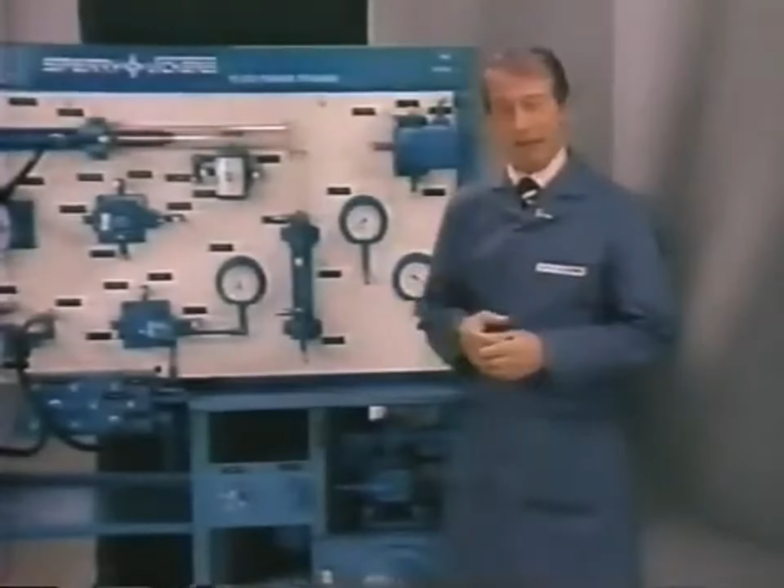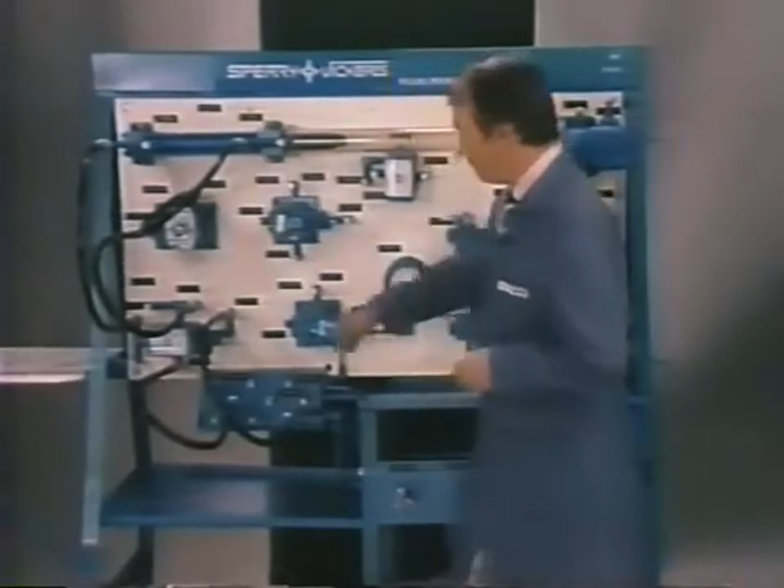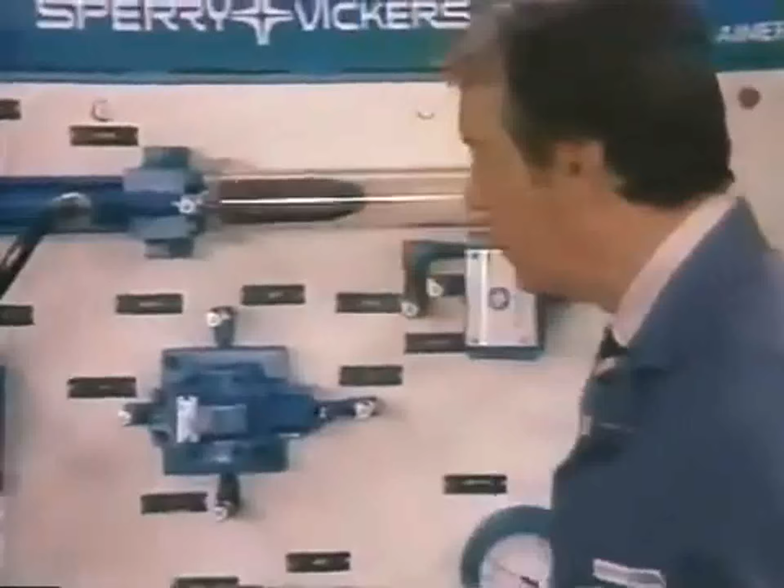Hydraulic circuits, even the most complex ones, are made up from a surprisingly small number of different components. Here on our fluid power trainer, for example, I've set up a circuit that includes a vane-type pump, a relief valve, directional valve, flow control, and cylinder. This type of circuit, with its slow feed forward and rapid return, can be found on any number of machines.

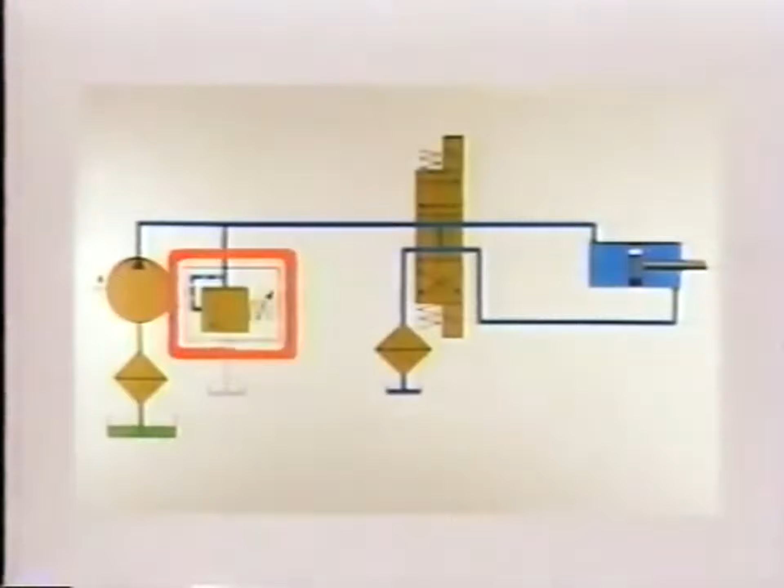Now, by shifting the directional valve back and forth, we can make the cylinder reciprocate, but we haven't provided a place for the oil to go when the cylinder stops at each end of its stroke. So we need a form of pressure control. We'll use a relief valve. Now we'll need something to drive the pump, and that can be anything you select, from an electric motor to a windmill, as long as it can provide the necessary torque and proper drive speed.

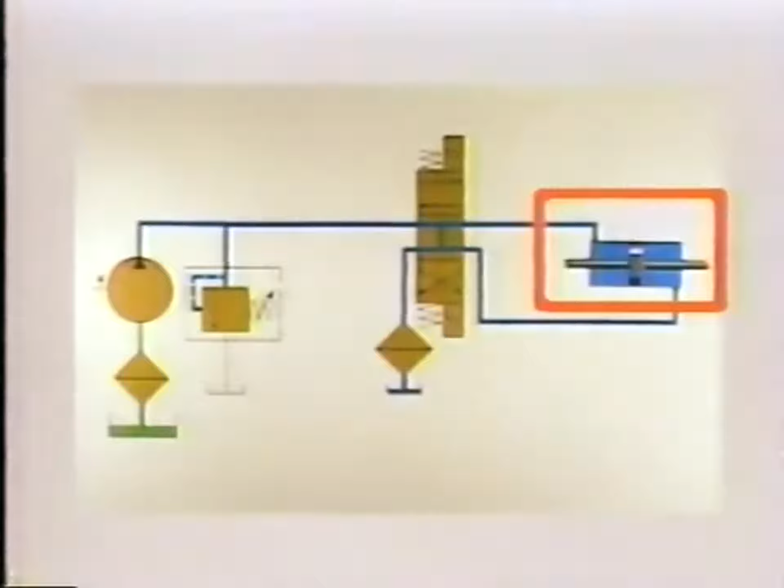If this were a circuit for a grinder, we might have a problem. The table would move faster in one direction than the other because of the differential areas in the cylinder. A simple fix would be to use a double-ended cylinder. Then the speeds and forces would be equal in both directions. Now, there is another way we could get the same results. It's called a regenerative circuit.

For equal speeds and forces, a cylinder with a 2-to-1 area ratio is used. That means with the piston retracted, the fluid in the rod end would be 1/2 of what's needed to extend the cylinder. To make it work, fluid from the rod end, instead of going to tank on the extending stroke, is routed back to the inlet side of the directional valve, and from there into the cap end. This means we will have equal pressure on both sides of the piston. But the greater force on the cap end, because of its larger area, will cause it to extend.

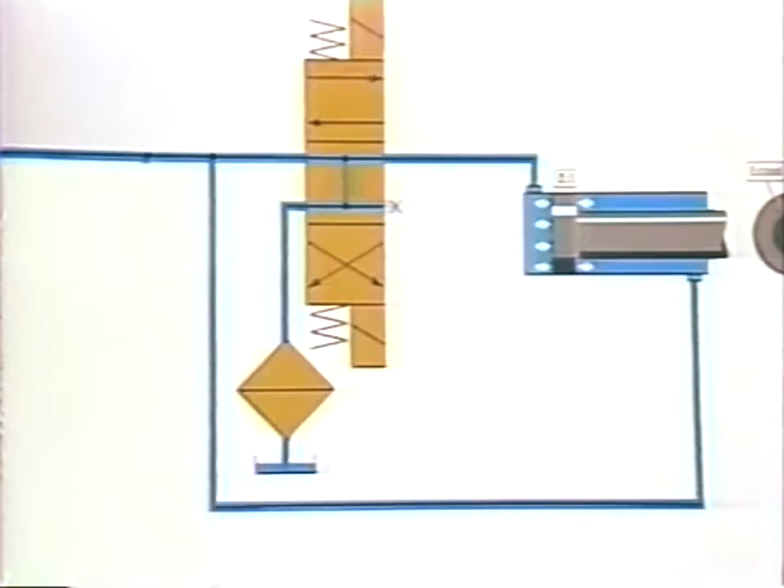Since the fluid displaced from the rod end provides half of the fluid required to extend the cylinder, the pump needs only to supply the other half, and it will take only half as long as it would in a conventional circuit. No, we didn't get something for nothing. Pressure in the rod end resists the forward travel, so what we gained in speed, we lost in force.

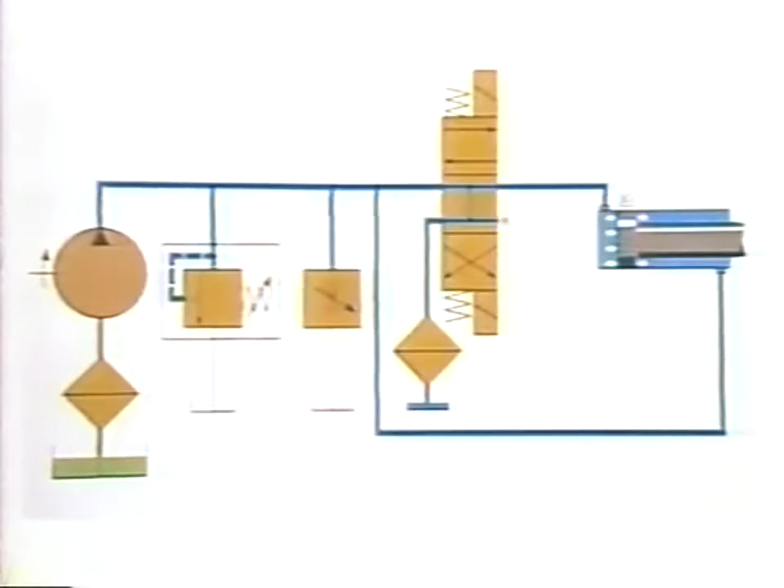If it were necessary to regulate the speed of the cylinder, this would be a good application for a bleed-off flow control. The workload is fairly constant, and there's no tendency for it to run away. We would save some energy, too, in that the pump would operate at the workload pressure rather than the relief valve setting.

Now, it's often necessary to have 2 cylinders which operate in sequence. That is, one must complete its stroke before the other begins. An example might be a clamping cylinder and a work cylinder. Naturally, we'd have to clamp first, but fluids take the course of least resistance, and if the work cylinder moved easiest, we'd be in trouble. Such an application calls for a sequence valve, which will not only assure that the clamp moves first, but also maintain sufficient pressure to hold the workpiece as the second cylinder approaches.

This time we'll use a single directional valve to control both cylinders. The sequence valve, which is held closed by an adjustable spring, will prevent flow to the work cylinder until the clamp is firmly in position. When pressure reaches that required for clamping, it will overcome the sequence valve setting and permit flow into the work cylinder. Pressure in the clamp cylinder will be maintained at the sequence valve setting regardless of how easy the work cylinder moves.

However, as pressure in the work cylinder builds up beyond the sequence valve setting, the clamp pressure will also increase. Sometimes, to avoid crushing the workpiece, a pressure-reducing valve is used to limit clamping pressure to a safe maximum.

A pressure-reducing valve is held in its normal open position by a spring and is closed by pressure sensed at its outlet port. With a sequence valve and a pressure-reducing valve added to our circuit, we can not only cause one cylinder to move before another, we can maintain pressure on it between set minimum and maximum levels as the second cylinder performs its function.

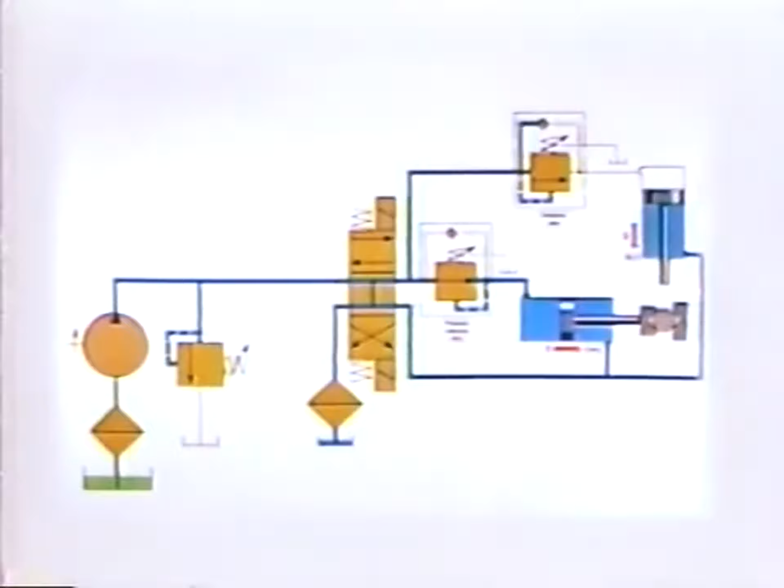Now, let's try a rapid traverse and feed circuit. They're quite common in machine tool applications for drilling, tapping, and similar functions. Since the work will be done on the extending stroke, we'll use a long cylinder with a single rod. In order to be able to stop in mid-stroke, we'll need a 3-position directional valve, which is spring-centered with at least the cylinder ports blocked.

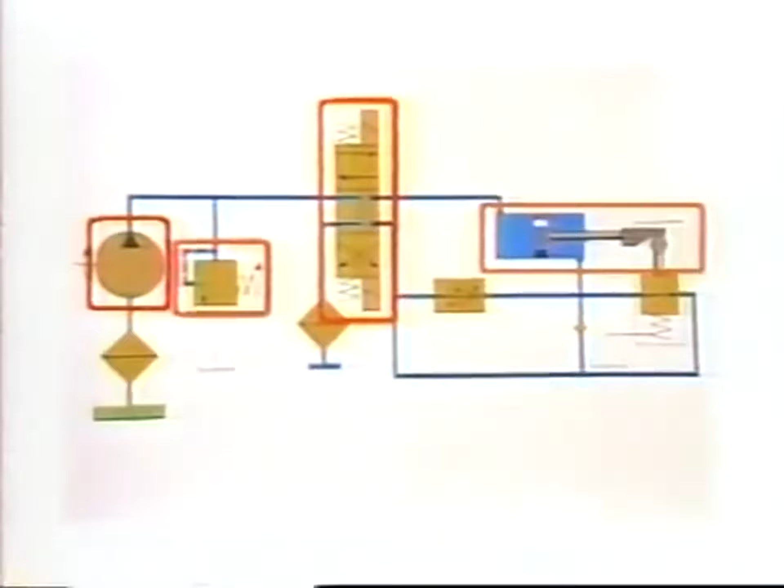Next, a large volume pump to provide the speed we'll need in rapid traverse, and the ever-present relief valve. Have you noticed these are the same basic units we used before? This time we'll put a flow control in the exhaust line from the cylinder. A drill might pull ahead as it broke through the work, so a meter-in or bleed-off circuit wouldn't do.

We now can control the cylinder's speed during its entire extending stroke, but that's not quite what we want. We need to move up to the work quickly, then slow down just before the drill contacts the work. To do this, we'll use a cam-actuated shutoff valve that's normally open. Its proper name is a deceleration valve.

We'll place it so it can be closed by a cam on the cylinder rod and pipe it so flow can bypass the flow control during the rapid approach to the work. By properly locating the cam, it will cause the cylinder to decelerate and feed into the work at the flow control setting. Both flow controls and deceleration valves are available with integral check valves for reverse free flow. But we'll place one here for the sake of clarity. It will bypass both valves for a rapid return stroke.

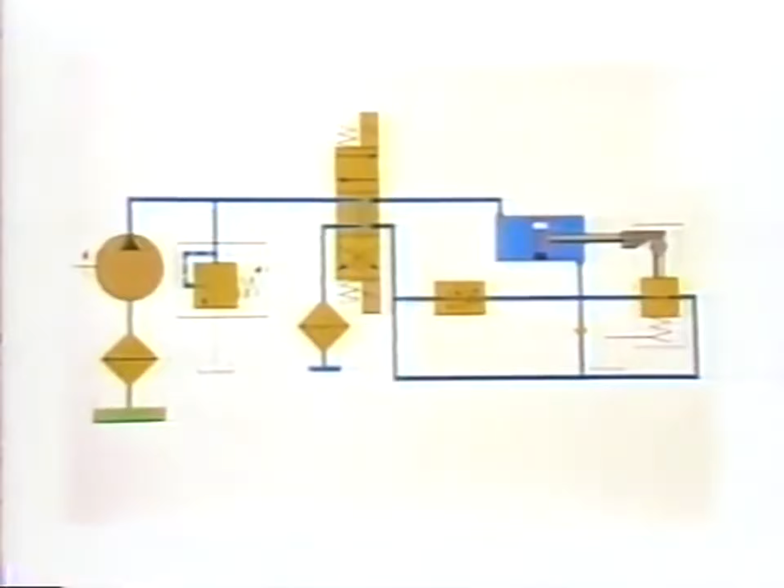As we mentioned, this circuit is typical of many applications where a large volume of fluid is required at low pressure to move quickly up to the work. Then only a small volume at high pressure is needed for the work portion of the cycle. With the single pump selected, the bulk of its delivery is not being used during the feed portion of the stroke. As a result, it returns to tank through the relief valve at its setting, and a great deal of energy is wasted. I might not have mentioned this if we didn't have a fix, but luckily we do.

It's called an unloading circuit, and it uses 2 pumps, one large and one small. The small one needs only enough volume to supply a little more fluid than our system requires at high pressure. The large pump will help out when the going is easy, during rapid approach and rapid return. To complete our package, we'll need an unloading valve and a check valve. The 2 pumps piped together will replace the single pump and provide the large volume required at low pressure.

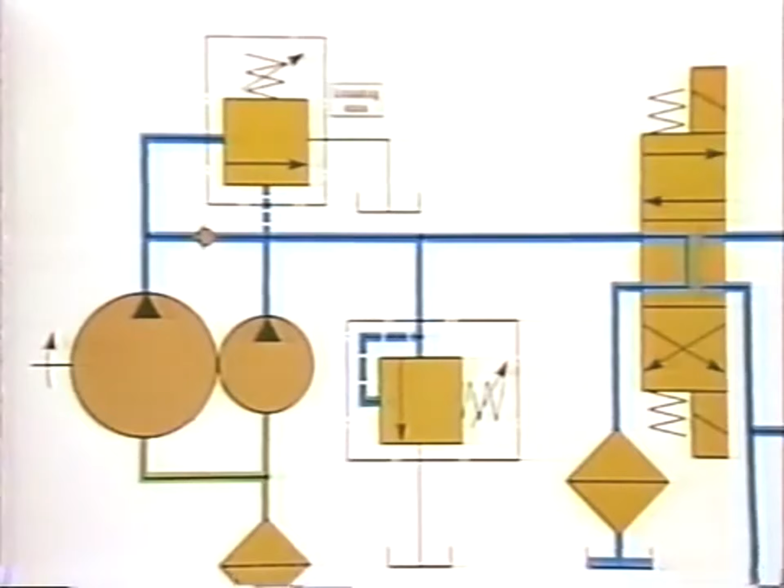When the pressure builds up, as it will when we go into the work portion of the cycle, the unloading valve opens, permitting the large pump flow to return freely to the reservoir. The small pump, however, cannot get through the check valve and continues to operate up to the relief valve setting. As the cylinder returns at low pressure, the unloading valve closes, and the large pump volume again joins the small one for a rapid return.

Come to think of it, we not only save energy with this circuit, we can usually get by with a smaller electric motor. With a single pump, the motor has to drive its full volume up to the relief valve setting. Using 2 pumps, the motor drives the combined volume up to the unloading valve setting.

The large pump delivery then goes to tank at little or no pressure, and only the small pump goes to the relief valve setting.

Now, how about another application? A hydraulic curing press. Here again, we'll need a lot of oil to close the press quickly, then a small amount at high pressure during the curing cycle. Sounds like another good application for an unloading circuit, and it is, but we're going to try another approach, an accumulator, a device for storing oil under pressure.

First of all, we're going to need a pump, relief valve, directional valve, and cylinder. If we select an 8-inch diameter cylinder, it will have an area of 50 square inches, and at 1,000 psi will develop a force of 50,000 pounds, or 25 tons. A 15-inch stroke would require 750 cubic inches, or 3.25 gallons of oil. So a 20-gallon-per-minute pump would close it in 10 seconds.

We'll use a closed center valve, but put a counterbalance valve in the line from the bottom of the cylinder. It does just what its name implies. It counterbalances the weight of the press platen and keeps it from falling. We're now able to open and close the press and build up to 25 tons of force.

But to hold it for several minutes would have our 20 gallons per minute pump running at 1,000 psi, with most of its delivery going back to tank through the relief valve, and that's not practical. We'd be wasting nearly 12 horsepower. Now this is where the accumulator comes in.

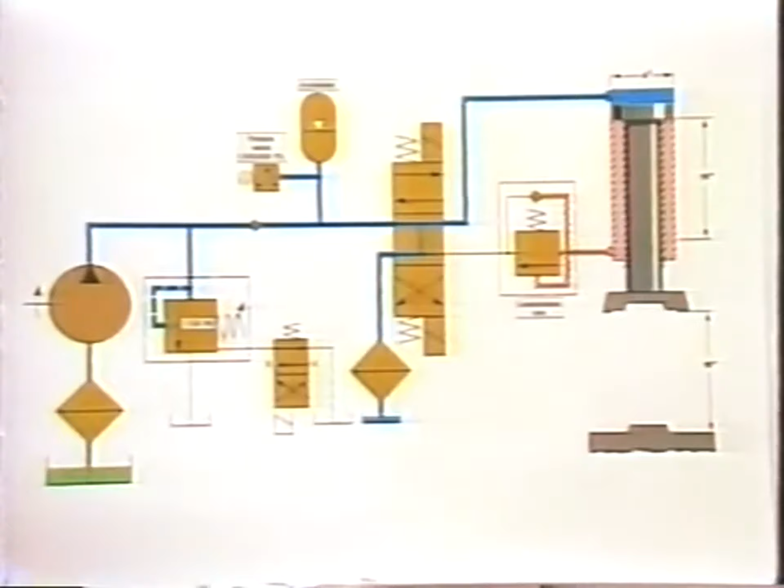Any drop in pressure can be sensed by a pressure switch, which at some predetermined minimum pressure will energize a solenoid valve and devent the relief valve. The pump flow will again be directed into the accumulator, but only long enough to replace the fluid lost through leakage, and the cycle will repeat. In this way, the pump will operate under pressure for only a few seconds during the entire curing cycle.

Well, looking back, we've discussed a simple reciprocating circuit, a regenerative circuit, a sequencing circuit, a traverse and feed circuit, an unloading circuit, and a hydraulic press circuit using an accumulator. That's 6 circuits in all, each quite different from any other. Now, let's see how many different hydraulic components we used.

Flow controls, to regulate the speed. Deceleration valves, for smooth transition from rapid advance to feed. Accumulators, for storing oil under pressure. And sequence, counterbalance, and unloading valves. We've grouped the last 3 together because they're essentially the same valve using different control pressure sources and either internal or external drain connections.

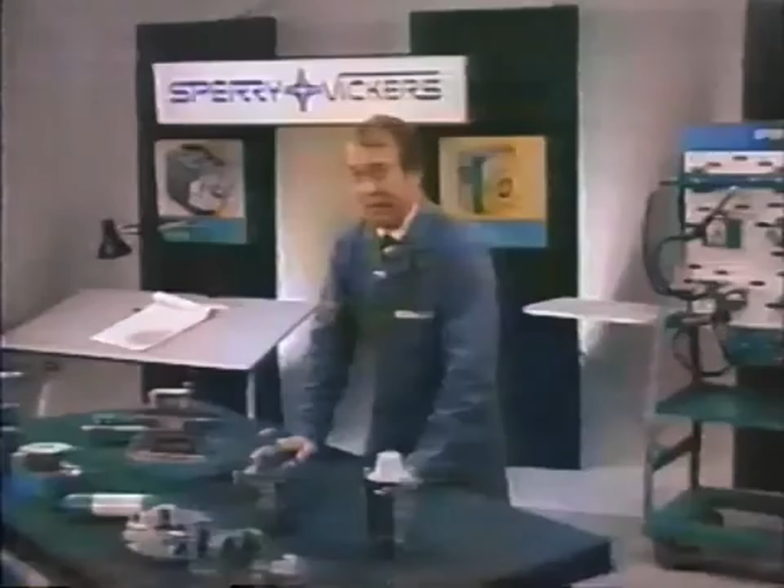Actually, we've merely scratched the surface of the many possible applications for hydraulic systems. Once we know the motions, speeds, and forces required, it's a simple matter to select the necessary components to provide them. You're probably already thinking up projects of your own. Why not start with a log splitter? You now have the know-how.

Well, that concludes our discussion of hydraulic circuits, which is the final chapter in our 8-part training series on the basics of hydraulics. I'm Paul Cook for Sperry Vickers.